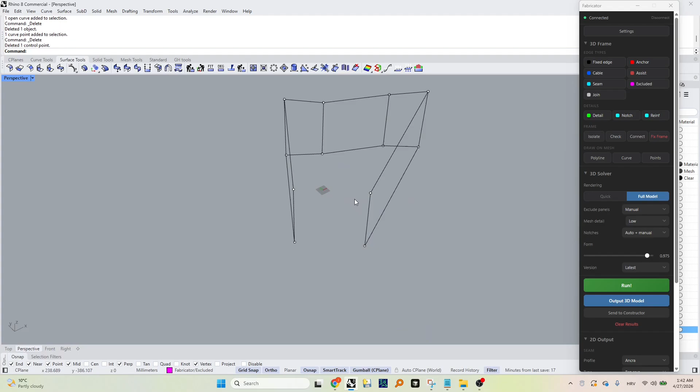Get rid of that. Let's try to do this. And now you will see that it's probably not going to process. It's not going to process because now the wireframe, it is 4 panels. 1, 2, 3, 4, 5 panels. It is 5 panels, but there is a 6th panel.

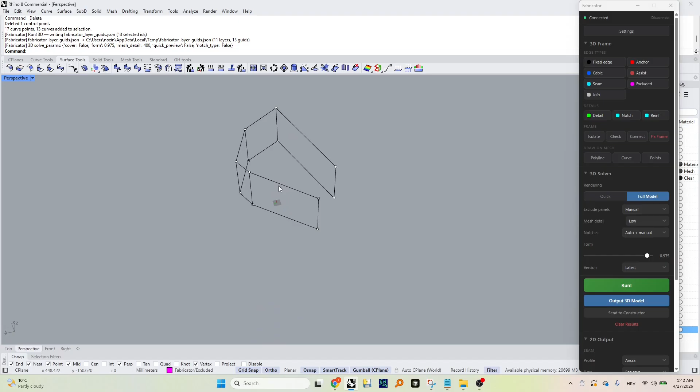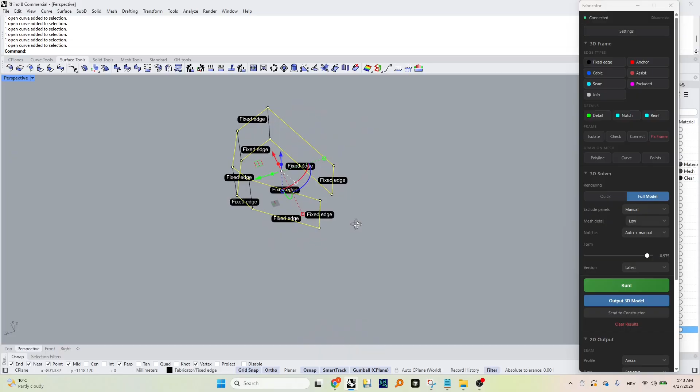There's a 6th panel that is not obvious, and this is all this outer perimeter. And down here, this is also a closed loop. It's a closed loop. It is the outer perimeter. You would never make a surface out of this willingly, but it is being calculated as well. So if you have a loop like this, on auto detect, it will be found.

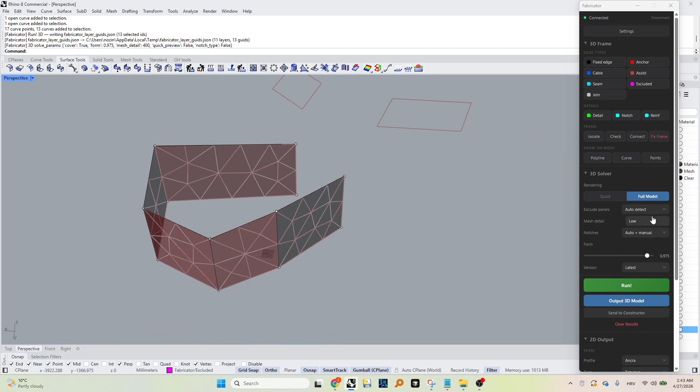But also you need to know on manual that you need to be aware of that. So on manual, if you put it on manual, we will do it by just excluding it like that. And now we're crossing out that entire loop, the big one, and you're getting basically the same result. And this is important for enclosures.

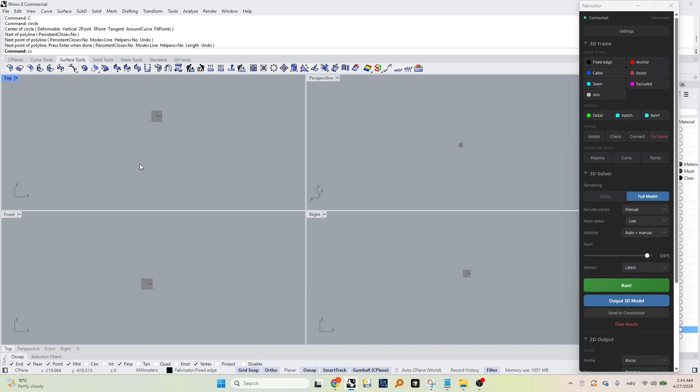So let me draw it in a little bit more recognizable way. Start. So I'm going to go to fixed edge. Curve. Something like this. This is maybe the bottom of your boat. This would be your keder track. These are going to be the edges of the boat, maybe a few zippers.

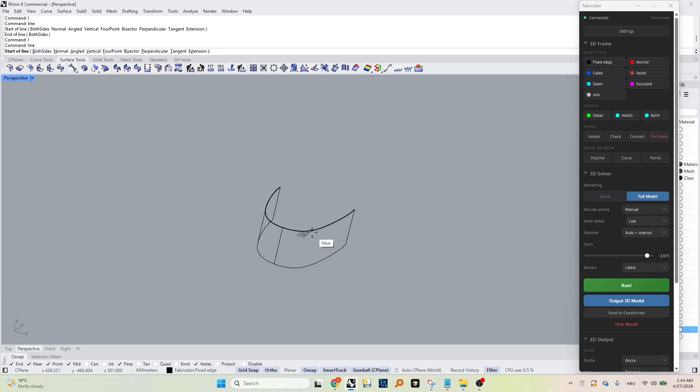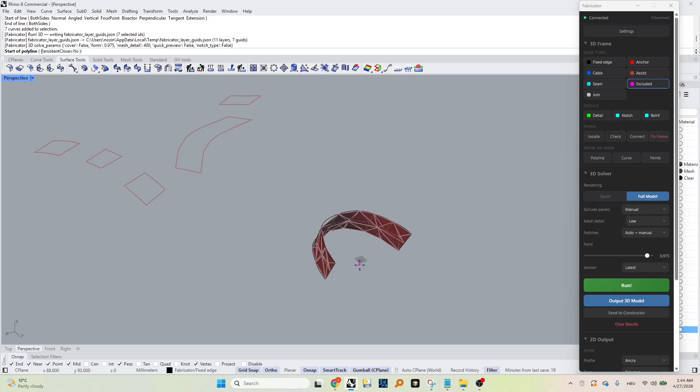Okay, and now when we run it, it is going to try to calculate the inner one as well. So there we go. It's even processed it, and you will see it here. This is the big one. It's overlaid on top of these. So we just cross it out. We cross it out with an excluded line. So all enclosures, anything that's open, on spray hoods as well, you will want to exclude it.

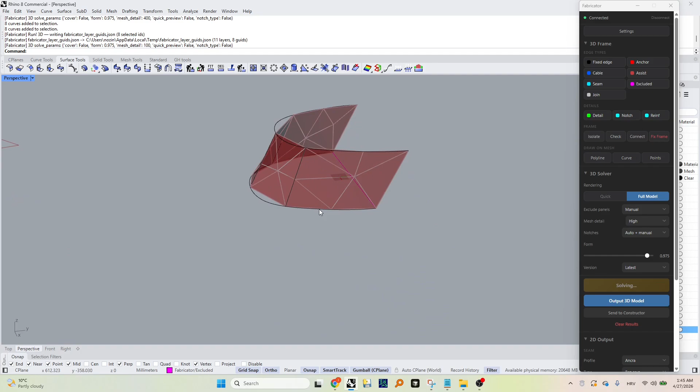Or you can try with auto detect. It will also probably work. This is just the resolution, as I said. If you put on high resolution, let's say, run it. It will be just fine. So this was the excluded line.

Now let's check out what is a cable. You will notice here, first of all, that there's a little bit of hollowing going down here. And this is because when we calculate the surfaces of the wireframe, we also apply the tension. So we apply the form to your model. And by default, this form is this number here. You don't need to know what it means exactly, but this is how we mark it.

And this means it's just not entirely flat. It doesn't calculate this surface entirely flat. It applies a little bit of tension. And this by default is a very good number. You can use it for almost anything just for a start, and then you can go down on that. If you're using cushions, for example, then you will want to put it all the way up to 1, which is completely flat. Let me show you. If you run it like that, it will calculate it flat, basically.

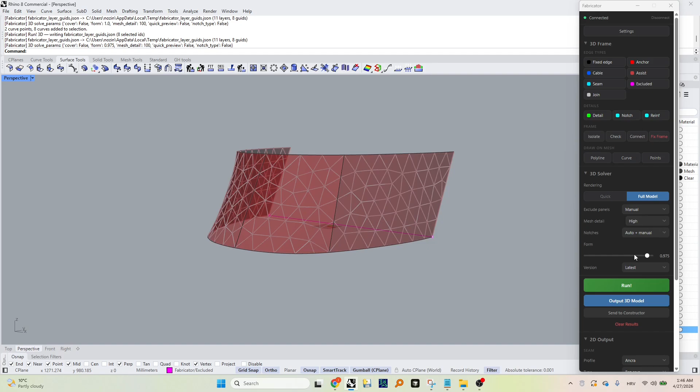And if you're feeling really conservative in your design, you can try it out like this. You can do it like this, but trust me, you're going to get much better results if you apply some tension. And how much, this is something that you need to decide by yourself with experience through projects, but with my experience and other testers' experience, this is a good starting number.

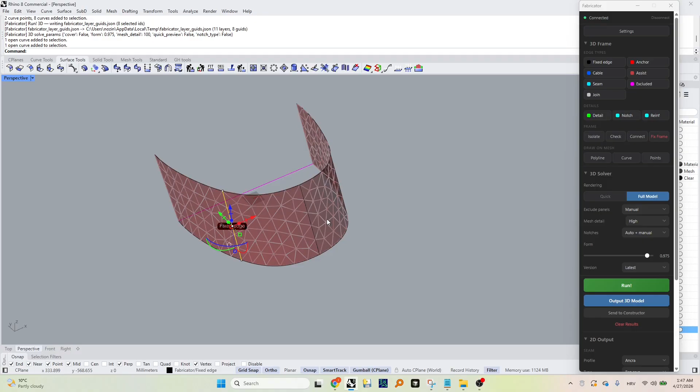So now you will see there's hollowing on these, but you will notice that these edges here, they're still maintaining the connectivity. They're being straight. They're not being hollowed out at all. This is because those are set as fixed edges. So this is where we introduce now the third. It's a cable. We just switch it to cable, and let's see what happens.

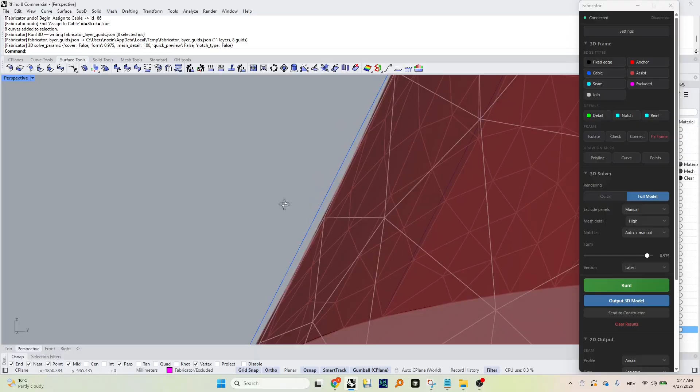Now we'll see some hollowing going on. You see that there's a disconnect here. There is some tension in those cables, so it's not completely hollowing it out, but it is a little bit. And you can see if we apply more tension, for example, you will get more hollowing. And the cable edges allow that.

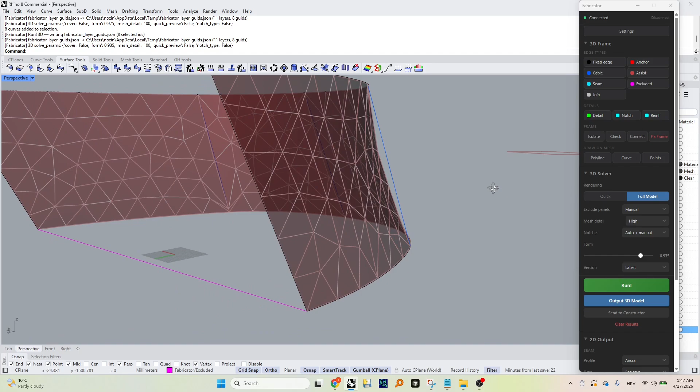Let's see again. Now with the same amount of tension, if we switch it back to fixed edge, run it, you'll see that it will snap back. Even though the panels themselves are hollowed, the zippers are not. And you don't want that. You want zippers to be hollowed. Cable.

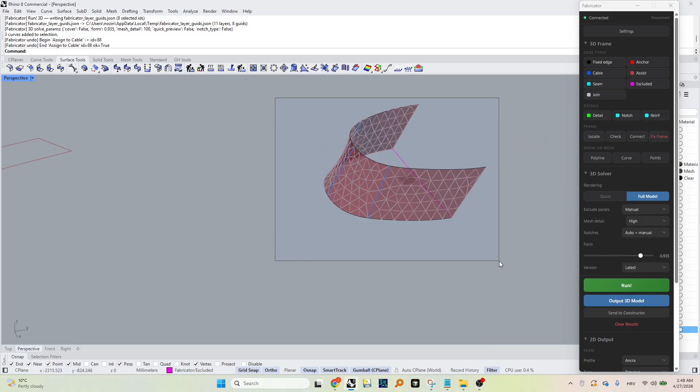And by the way, shout out to Dave Elliott for the phrase hollowing.

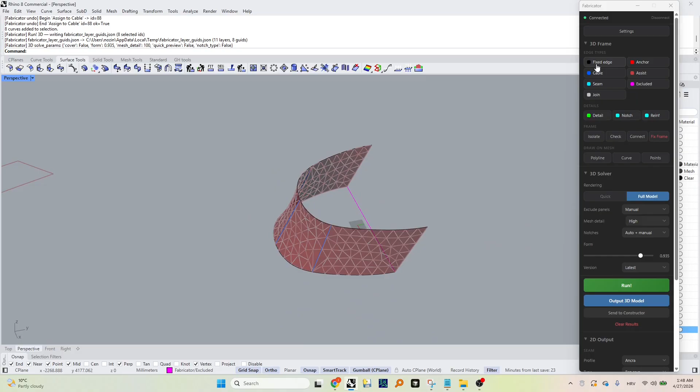So you can see now it's clearly being pulled in. All right, so this covers fixed edge, cable, and excluded.

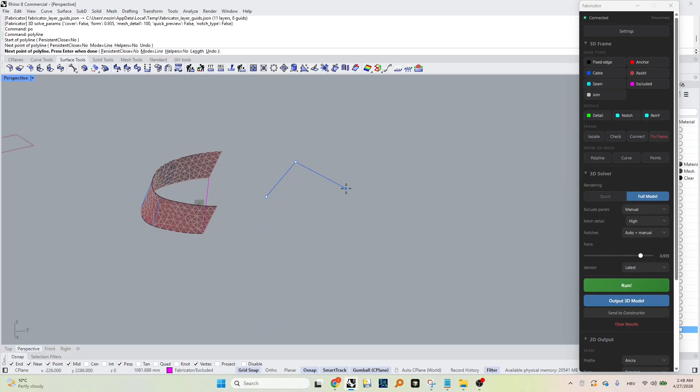So what are seams? Seams are very similar to the cable, but there's one key difference. Maybe the best way to explain this is by drawing another loop here in cable, and we will draw like that. If we run that, you can see that we get the hollowing of the sides. This is now becoming a shade sail, and now you want to crank this up. The shade sails, they need to have curvature.

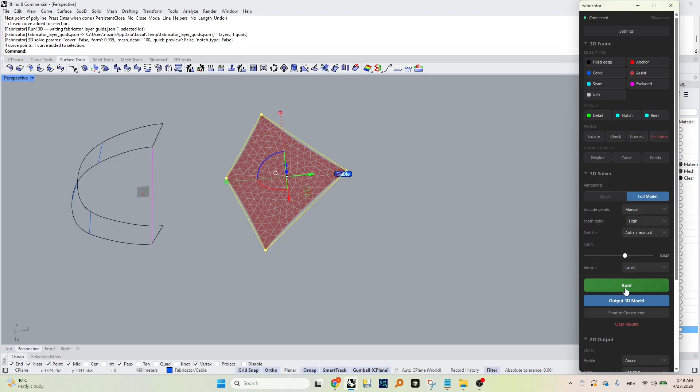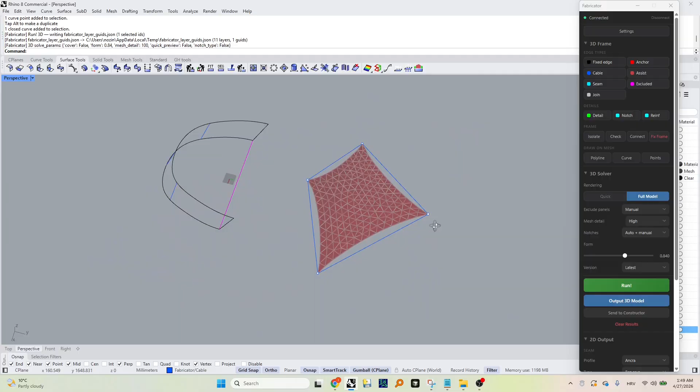So if you crank it up, if you lift these up, all right, so now we're getting a nice shade sail. It's already formed nicely. And these are cables. It doesn't matter if it's a single line, it's treating all of these segments as a single cable. We can also explode them. 4 cables, the result is going to be the same if we run it.

But what makes this a cable is that along its edge, it's going to allow the material to tension inwards, but on the ends of the cable, there will be an anchor. So this is the main difference from cable and the seam. And now to explain actually what seam does, we will just not do that because it will not work, but I can now draw here 2 seams. And what this will do, it will cut the shade sail in these 2 positions.

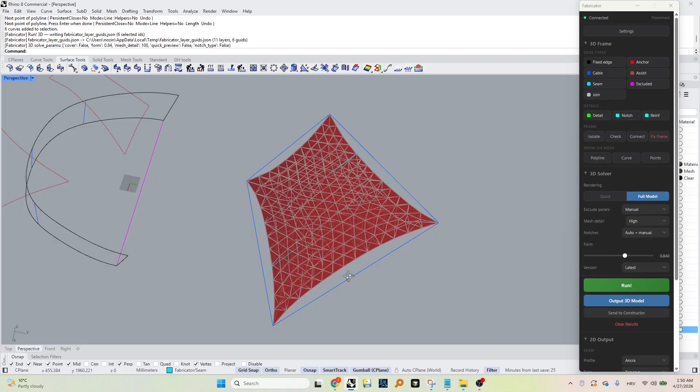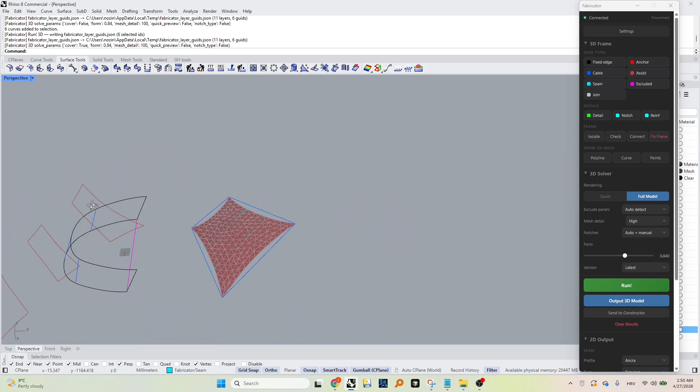And you can see now that it's creating also the bottom one. So in shade sails, I think it's best just to put auto detect because it's creating the bottom loop, the outer loop. Let's run it again. With auto detect, it's going to remove the bottom loop. Now we're getting, just move this out of the way, now we're getting the shade sail in 3 pieces. We can just quickly output this. And you can see when you explode it, it indeed is 3 pieces.

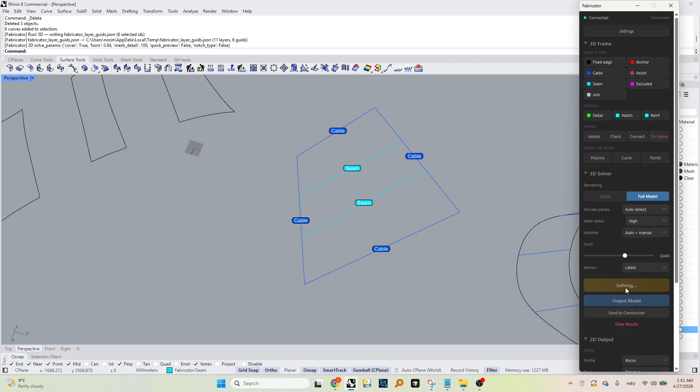So the seam allows form finding of these edges, but it doesn't have an anchor on the edge. If we would put these to be cables, can you guess what will happen? We are getting anchors on each of these. So that's the main difference between cable and seam.

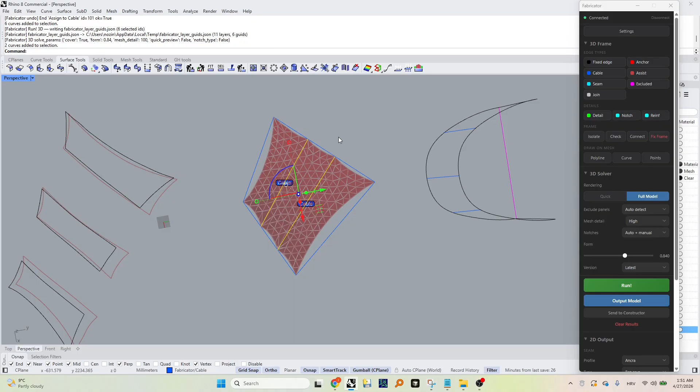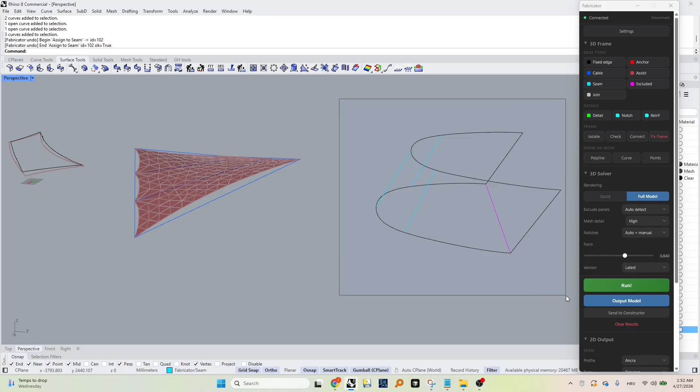So when we use it on a place like this, it doesn't really matter because this is a fixed edge. So in any case, all of these edges are going to be fixed. So if you put a cable here, the anchor here is redundant. So we might as well put it as a seam. We don't care. One little difference is that the seam is going to allow a little bit more of hollowing. There's no tension here. But if we put a cable, there's going to be a little bit of tension. Barely noticeable, but it is there, just for you to know.

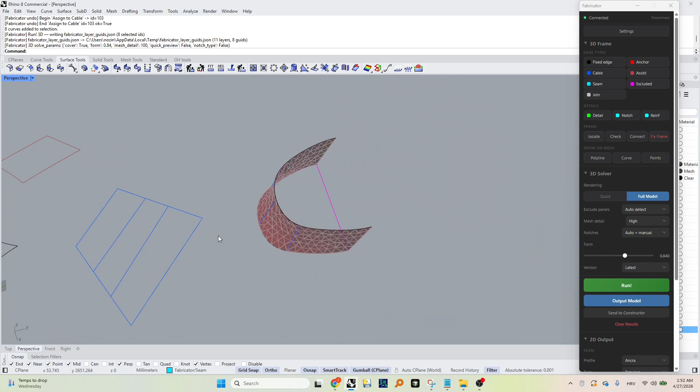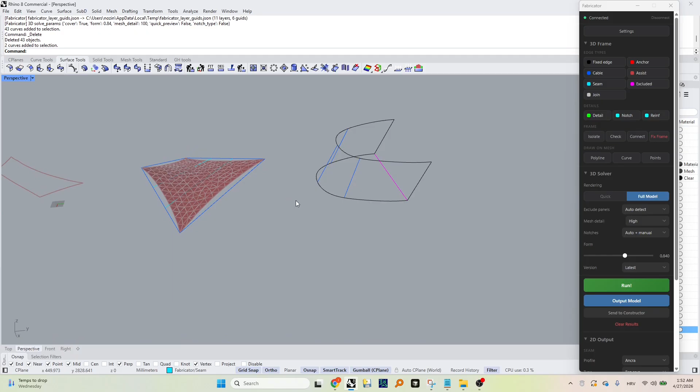So now let's get back to this example. Just put this as seam, run it again. All right, there we go. So that's our shade sail. So this covers fixed edges, cables, and seams. And now this is a very simple example, but you may use it in whatever ways you like.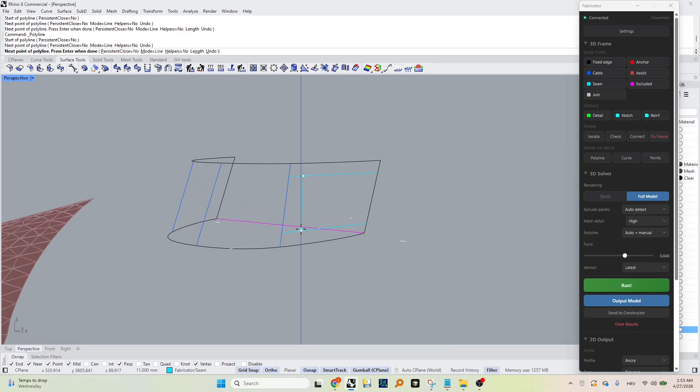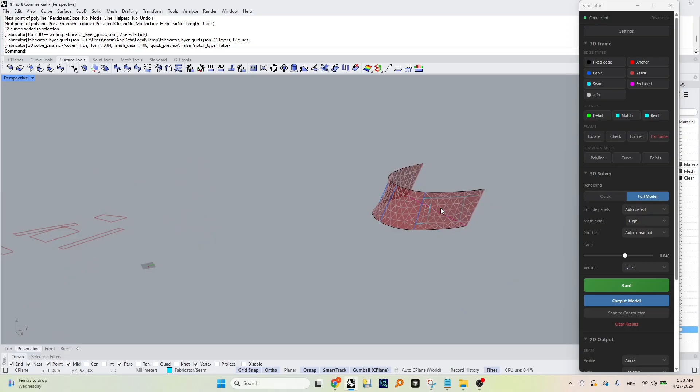What I started doing in my own designs is I started splitting up the panels with seams into windows and sides. You can do that. So let's say you just take, like that, that, make like that. You make a window. When you run this, you'll still get a nice 3D shape, but you'll get all the pieces of the window cut out. Something else.

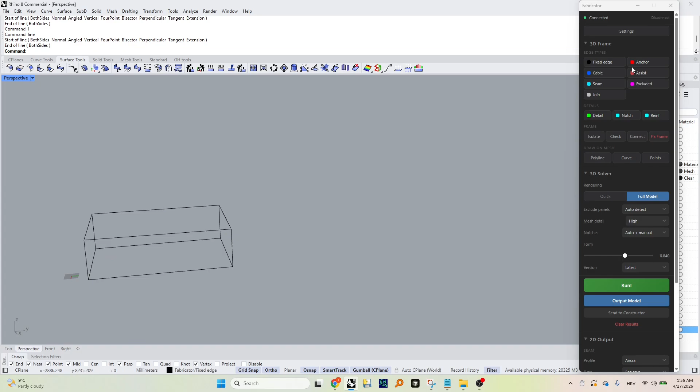This was just a simple box cushion. And at this point, actually, let's move on to joins. We'll get back to assists. I need a more difficult model to explain this one. So let's just go back to joins. So let's put this to manual. I'll run it. And now we're getting the box cushion, right? So now we're getting the top sides and this.

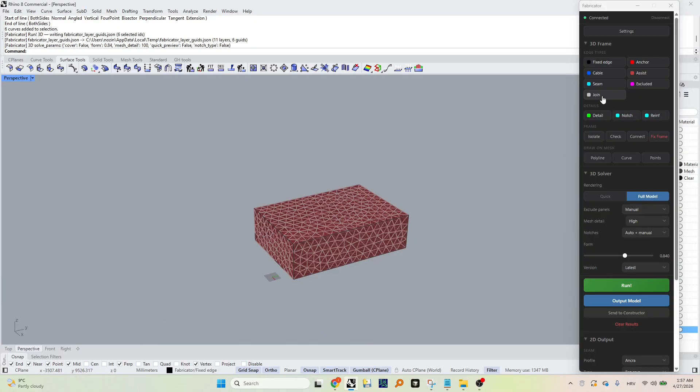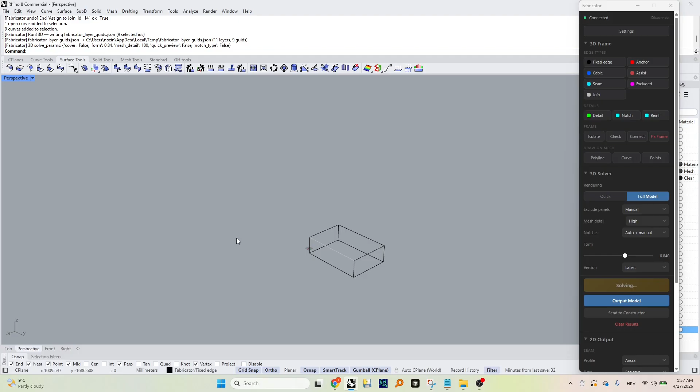All right. So join. What you can do with join actually is, well, it's just joining two pieces together. So if we switch this to join, it's going to stay a fixed edge, but it will join these two loops. So this loop and this loop, it will join. So we run it. And there you go. Now you have a single upper panel, side, side, side, and the bottom panel. And you can keep doing this.

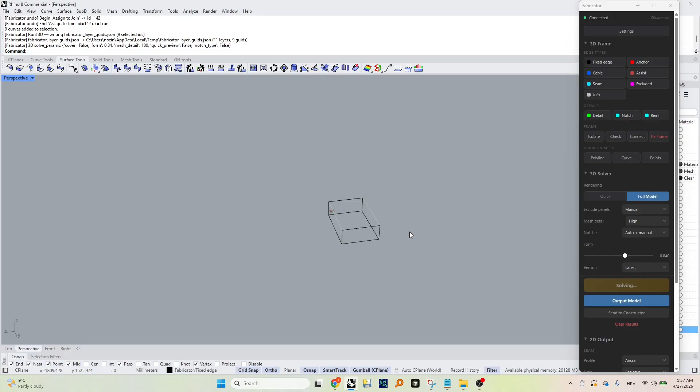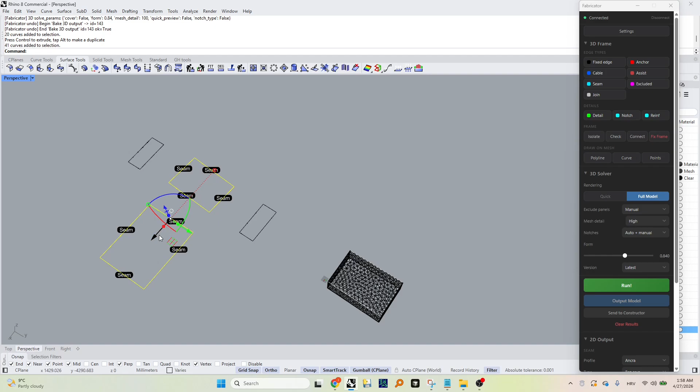Switch this to join. Now we're getting the bigger upper piece, kind of overlaying one on top of the other. So when you need to output it, you need to just slide it a little bit, but you can see the bigger one and the bottom one. And you can keep doing this. Also, you can do it like that.

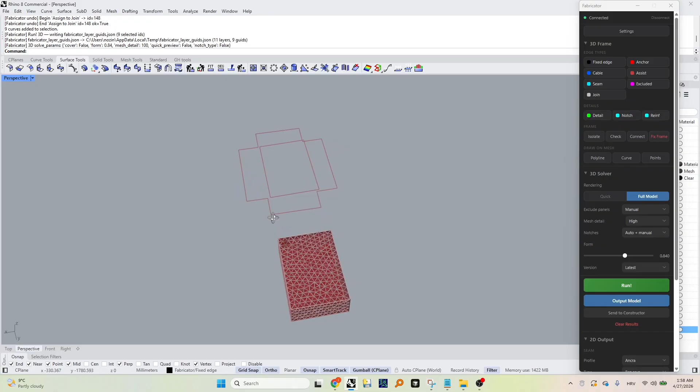Now you will get one piece with all the sides combined, and the other piece is going to be the bottom piece. There we go. Of course, all the match marks are there. So that's the join one.

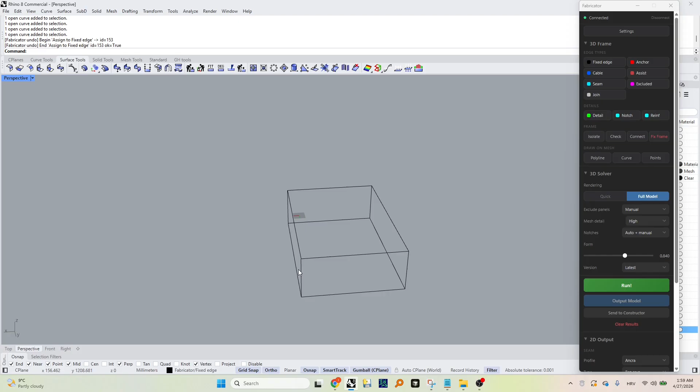And you can also do it in a way that, let's say you want a box cushion, and you do want the sides, but you don't want the seams here. But you need here the lines to be able to define the model. So we can join them. Well, let's say we want seams to be here. So now you're getting a box cushion with seams in the middle.